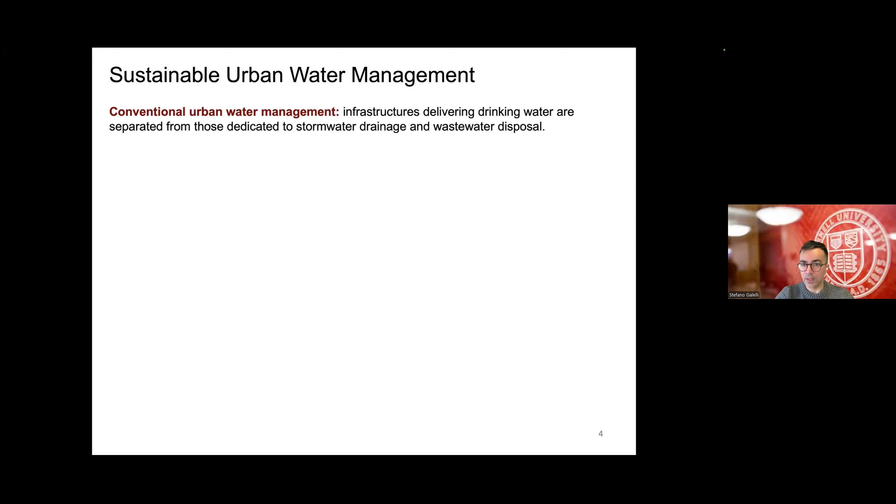So why do we need those types of reservoirs? I think to explain that, it's important to take one step back and think in terms of conventional urban water management, where infrastructure that delivers drinking water is typically separated from that used for stormwater drainage and wastewater disposal.

But if we think about water infrastructure in urban environments for sustainable urban water management, what we see is essentially the combination of infrastructure that can serve multiple purposes at the same time, such as supplying drinking water, retaining stormwater, and perhaps, to some extent, supporting wastewater management as well.

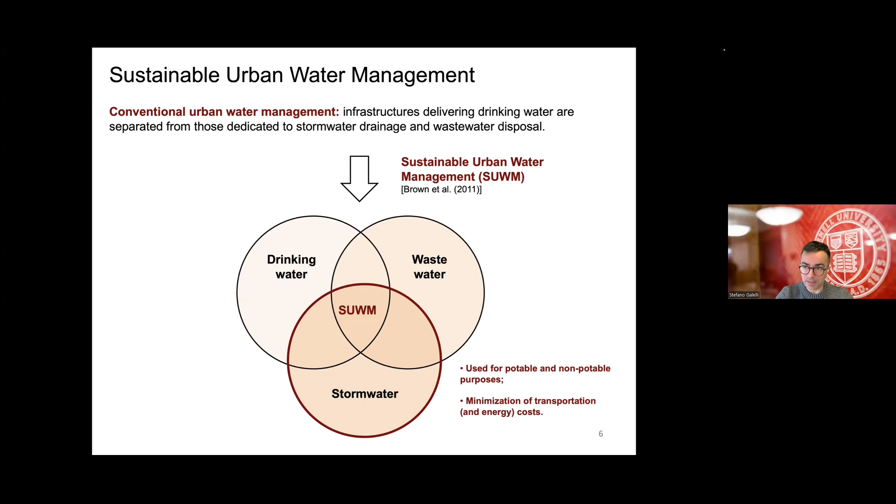So the idea with sustainable urban water management is essentially building infrastructures like Marina Reservoir that can be used for potable and/or non-potable purposes, close to the urban environment, reducing the cost associated with the transportation of water, and ideally helping us start to close the hydrological cycle in an urban environment.

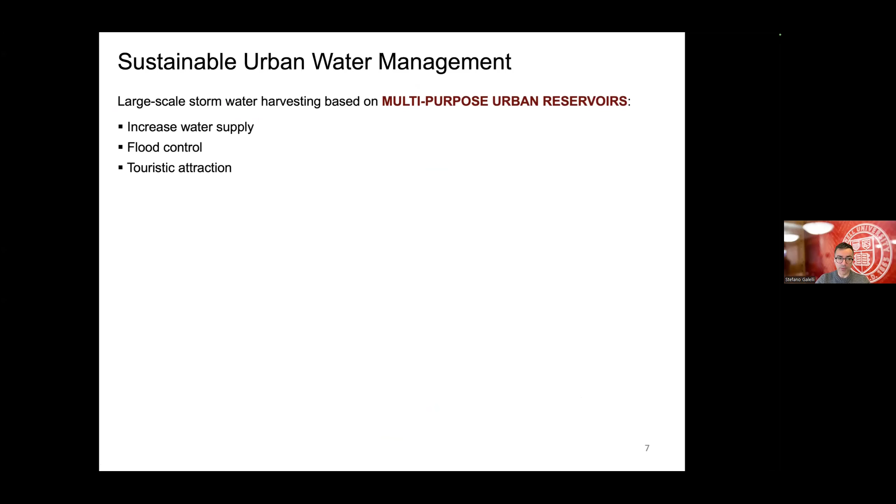These therefore become multi-purpose urban water reservoirs. They can help us increase water supply, control floods in urban environments, and may serve as a touristic attraction. But meeting these different goals, of course, comes with different challenges. So what are these challenges?

First, and I believe this point is particularly important: urban catchments tend to have very large impervious areas, which generates a large amount of runoff. The amount of runoff an urban catchment generates is larger for the same amount of rainfall than that generated by natural catchments, meaning the time of concentration of catchments tends to be very short, and we have to be ready to handle fairly large inflow water volumes in a very short time step.

In a very short amount of time, you will see, for example, later on that the decision-making time step is hourly. This is a big challenge, I believe, for computational scientists as we think about operating reservoirs in real time, or making decisions every hour or every day about how much water we want to release, how much water we want to retain for drinking water purposes. Then we have to be able to decide very quickly and in response to potentially large runoff volume.

The other big challenge is that urban reservoirs located in urban environments often have to satisfy conflicting objectives. For example, we may want to retain as much water as possible to supply drinking water. But on the other hand, the more water we retain within the water body, the higher, obviously, is the flood risk. So how do we handle conflicting objectives while making decisions frequently and quickly is indeed the challenge I want to talk about today.

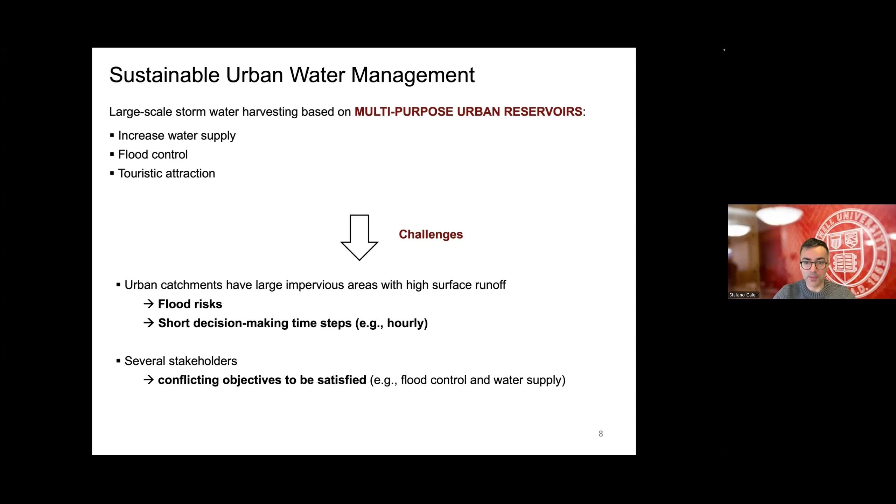So the case study that I'm going to talk about today is Marina Reservoir. I had the privilege and opportunity a few years ago to work on these reservoirs. It was a very interesting project to work on. For those of you who are from Singapore or Southeast Asia, but also for those less familiar with the system, let me give you a little bit of background, and also let me reconnect this to the challenge of working with coastal water reservoirs.

These are very interesting reservoirs because they are coastal. They were created by essentially closing, using dams, the estuaries of a number of rivers. But at the same time, they are urban reservoirs as well, because most of them, excluding a few, are located within an urban environment.

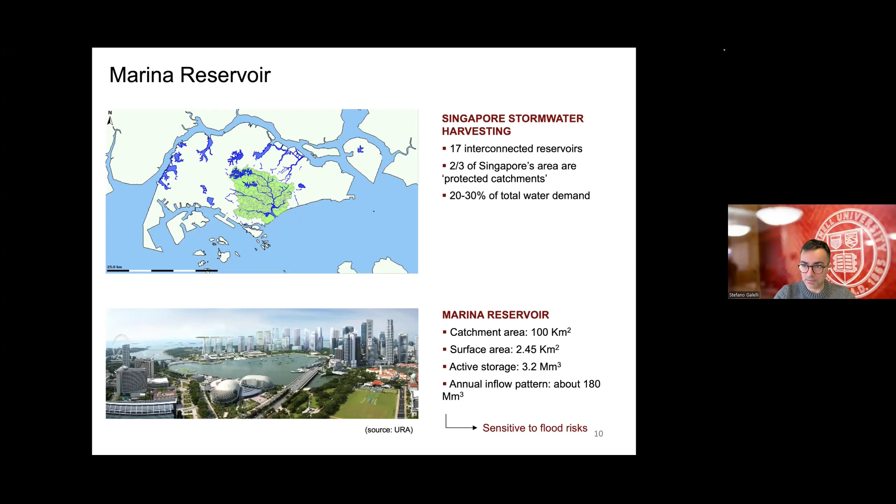Another number I want to give you that I think is very interesting is the active storage, roughly 3-point-something million cubic meters, versus the annual inflow pattern, which is roughly 180 million cubic meters. So you see the ratio is roughly 1 to 60, 1 to 55. This suggests that these reservoirs can fill and empty many times during the year, and that can happen very quickly. So being able to operate this reservoir properly, as Singapore does, is very important.

As the reservoir operates, there are 7 pumps that can be used when the water level in the South China Sea is higher than the reservoir in Marina Reservoir. There are a number of weirs that can be opened, and there are also bottom pipes located at the bottom of the reservoir. The primary objective is to protect the city center from floods while storing drinking water for water supply. Being able to operate the barrage efficiently is important, perhaps less important than flood protection and drinking water supply, but it's still of value. At the time we were working on these reservoirs, there were also conversations about making sure that the water quality within the reservoirs remains good.

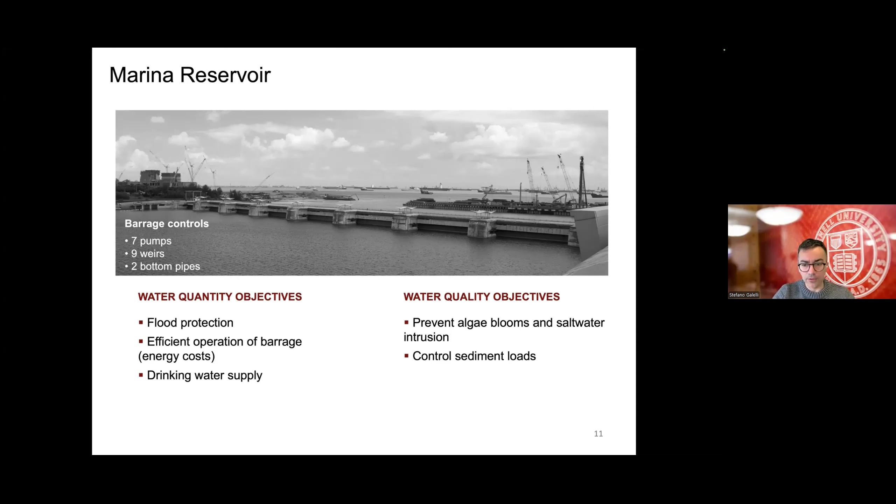That means preventing algae blooms, preventing the intrusion of salt water, since the reservoir and dam are built to separate the estuary from the South China Sea, and also controlling sediment loads to the reservoir.

Just a few more details about the hydraulic infrastructures. As mentioned, during low tide events, if it's necessary to release water, the weirs can be used, whereas during high tide events, Marina Barrage is equipped with large pumps that can pump water outside. Of course, pumps require more energy than operating gates.

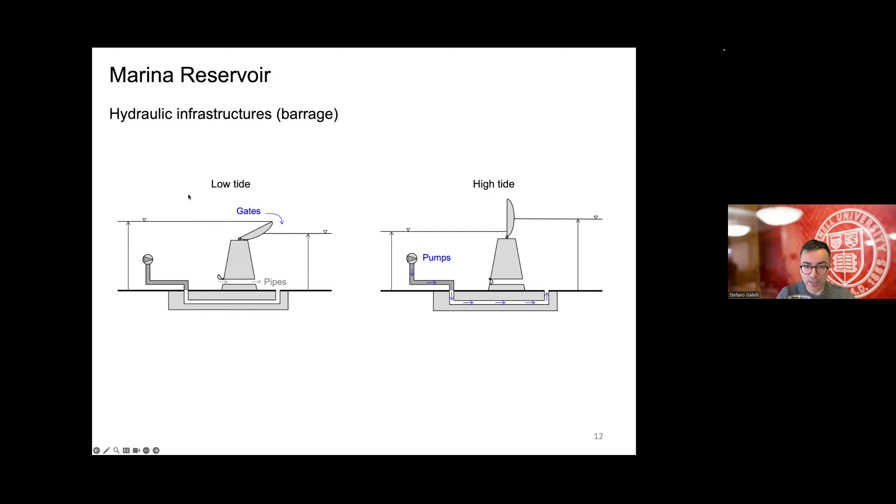The reservoir is also equipped, a few kilometers upstream, with a drinking water intake that supplies water to the drinking water facilities.

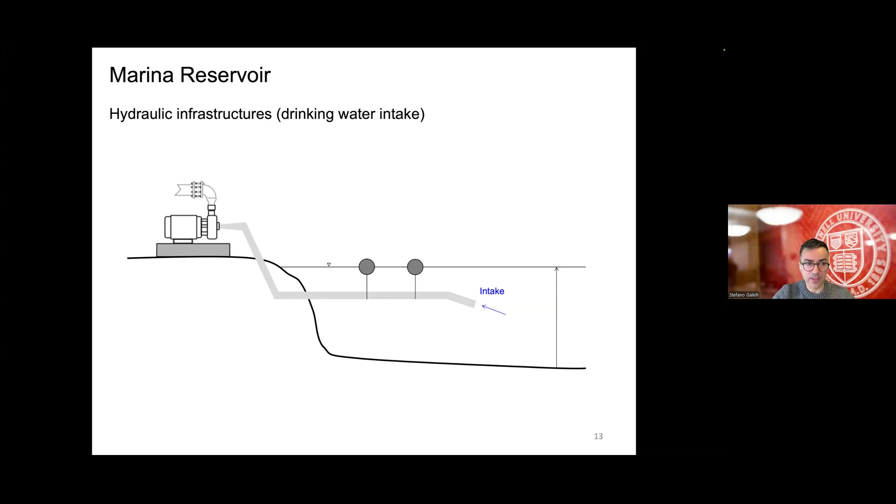Now, let's talk about water quality control. The seminar gets a little bit more technical. The fundamental question here is, how can we support decision makers? How can we make decisions in real time? By real time, I mean hourly, in order to operate this reservoir in the best possible way. This part builds primarily on optimization, water system analysis, and a little bit of hydrological modeling.

First thing first, and this is a diagram that we'll probably use in any of my classrooms. What we want to do is to have a schematic, get a sense of how the water system could look like. So the core, of course, at the heart, we have Marina Reservoir.

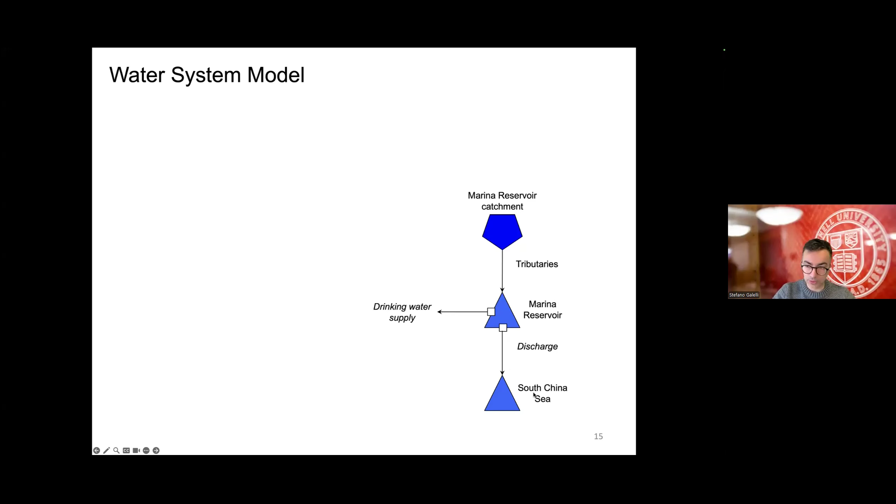It's a reservoir with a number of control variables. We have an inflow that essentially comes from the multiple tributaries located in the Marina Reservoir catchment. And then downstream of the reservoir, in this case, is a coastal water reservoir. We're not discharging into a river, we're discharging directly into the ocean.

So what are the control actions that we can take here? We have to decide how much water we want to discharge to the South China Sea using surface gates, how much water we want to discharge using pumps, and this is preferable to using pumps if it's feasible during low tide events. And then, how much water we want to supply to the drinking water facilities.

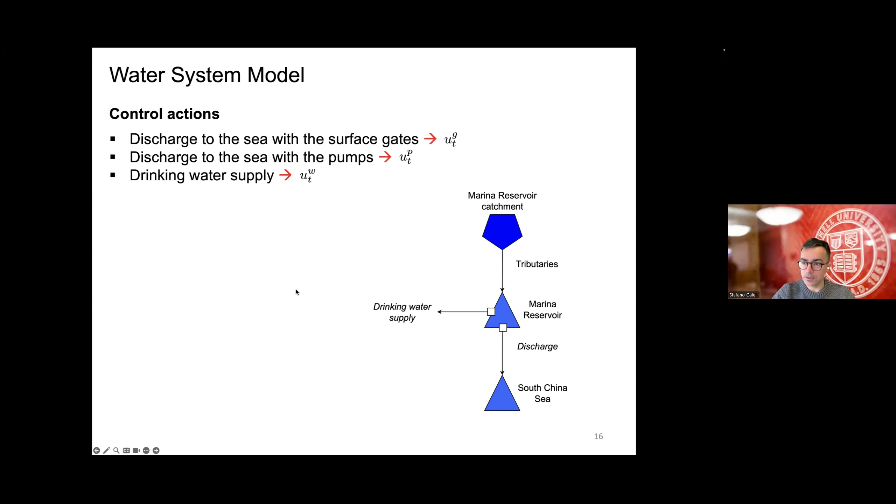So that's the first thing, right? We want to understand what are the actions that we want to take. Now, actions have always to be tuned or calibrated to meet some specific objectives of interest. The objectives that we came up with at that time were discussed, to some extent, with the Public Utilities Board of Singapore. So what does, in fact, make sense in terms of taking actions?

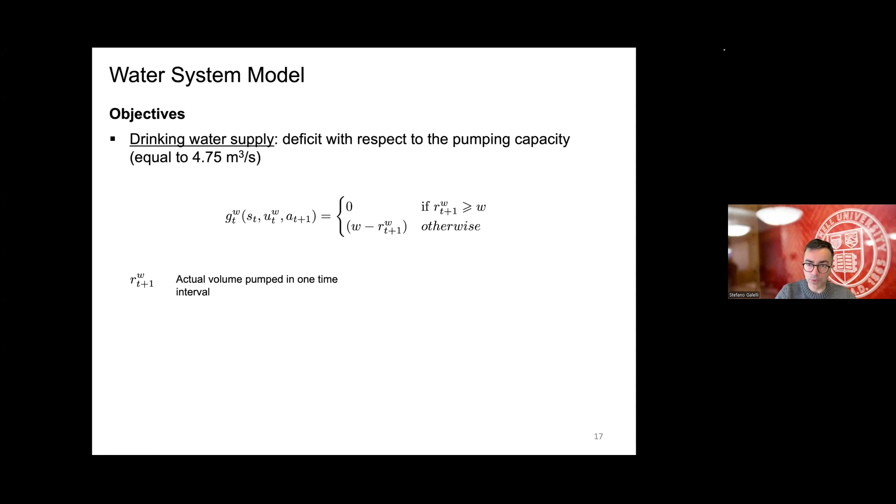First objective: this reservoir is designed to serve multiple purposes, including drinking water supply. The idea here is to define a step cost, as we would call it in control theory, that is equal to 0 if the amount of water we are pumping upstream is equal to or larger than the required amount, which in this case was close to 5 cubic meters per second. Otherwise it is a deficit of water supply, so we're paying a penalty associated with not pumping enough water to the drinking water facility.

Second, which is very important, is flood risk. There's an operating range of roughly half a meter. H here indicates the water level in the reservoir. And the ideal target is to keep the water level in the reservoir within this target.

Why this target? Two reasons. This is a safe operating zone or operating space for the operators, so as long as they're in this range, it's relatively easy to handle big flood events coming into the reservoir. At the same time, keeping the reservoir in a range of roughly half a meter preserves the beauty of the rest of the reservoir, which is really an iconic water body located in the heart of Singapore. As long as we are within this range, everything is fine.

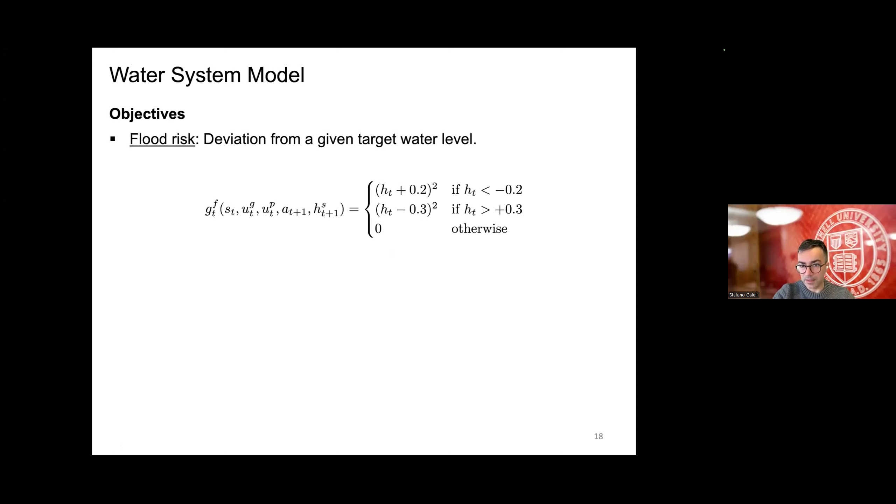But as we go outside of this range, either above or below, we essentially square the distance between the actual water level and the ideal target. So this is our second step cost.

And then third, as mentioned, perhaps less important, accounting for pump use. If we're trying to reduce energy use, it may make sense to account for how much water we're pumping instead of releasing using gates. So here we're simply squaring the water that is released through the pumps.

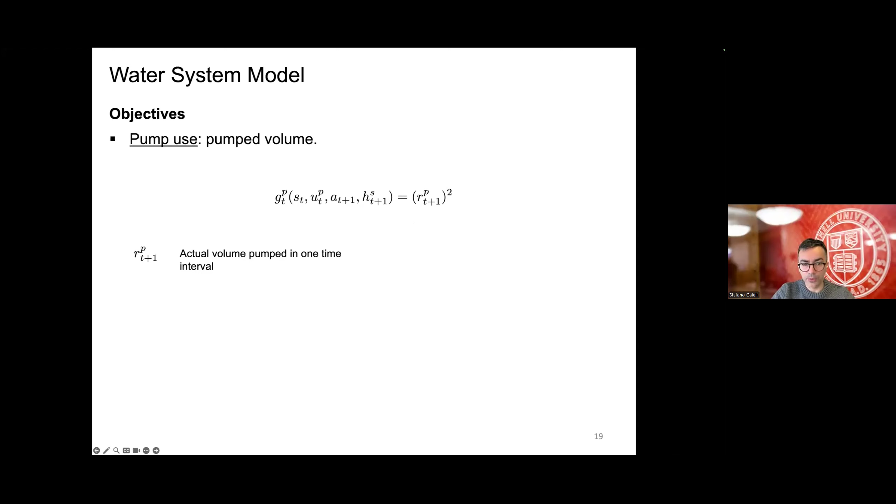Now, if we look at the entire water system again, we start to populate this system with a few terms I've just introduced. We have an inflow to the water reservoir, denoted here as A. We have the water storage, calculated simply using a mass balance equation. We determine how much water we want to pump upstream to the drinking water facilities.

And then we have to make a decision, denoted here as G and P, which is essentially how much water we want to release through the gates and how much through the pumps. Some of you with a keener eye for mathematical notation may wonder why I have the decision and then the corresponding release for the upstream pumps for drinking water supply, as well as the decision for gates and the actual release we implement through gates, and the same for the pumps. The reason is that sometimes we make decisions, but those decisions may not be feasible because they violate technical, physical, or legal constraints. I'm not going into the mathematical details of that, happy to answer questions if you're curious. But the idea is there's essentially a difference between what is being decided and what can actually happen.

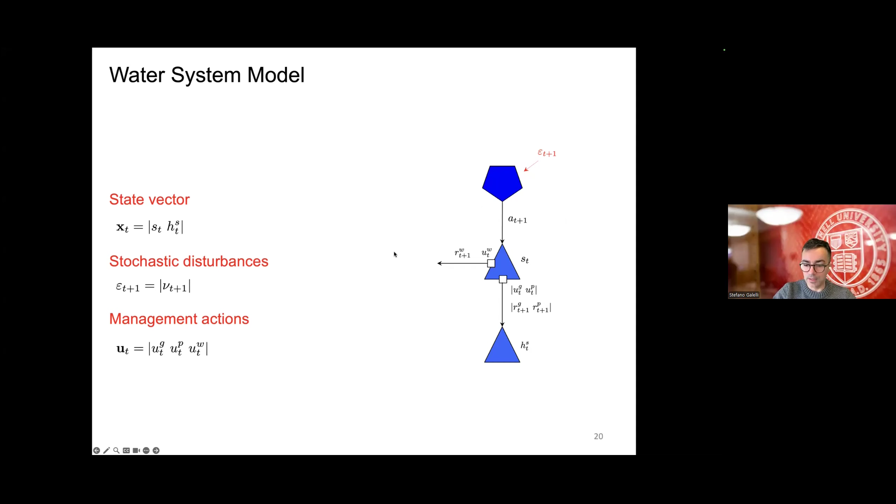So what we did here was to combine these three different objectives using a weighted sum, giving priority to flood control and drinking water supply. We take the expectation of this because the inflow is a stochastic process affecting the reservoir dynamics, and it's hard to determine when we will stop using the policy.

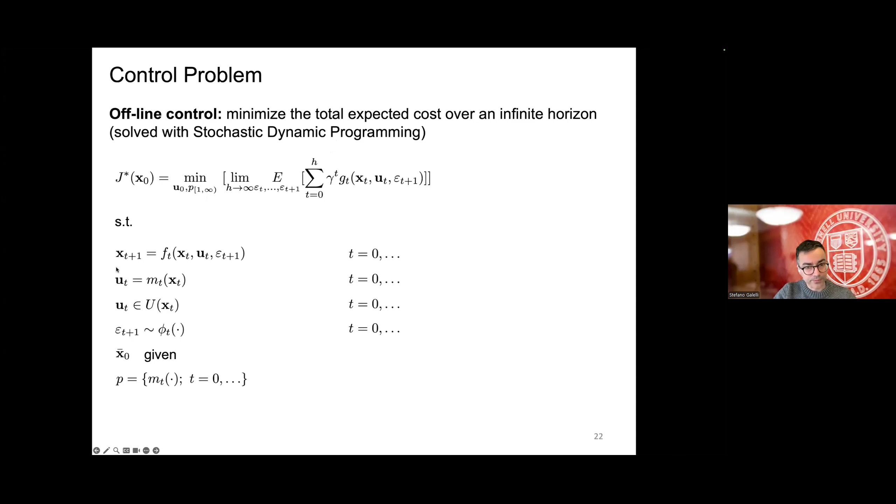And what we're trying to get is our control policy. I know it's a little abstract, so let me go to the next slide and show you how the policy looks. Once you see the policy, I think things will start to make more sense.

If the sea level is below our reference, which is zero, so we are in low tide condition, and there is no water in the reservoir, then we don't really have to release water. But as the storage in the reservoir increases, you see that we bank on the gates more and more. But for very high sea level values and relatively low storage in the reservoir, we can't really use the gates—if we open them, we're actually going to have seawater coming in, which is precisely where the pumps come in.

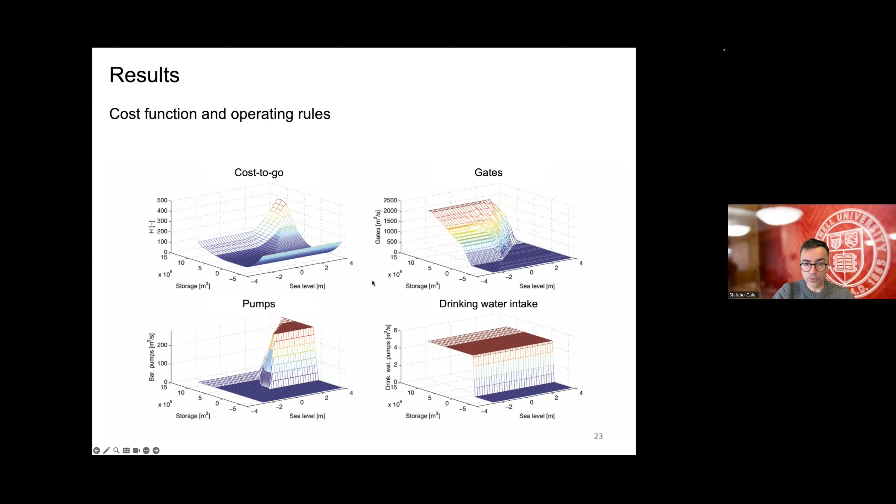Dynamic programming, stochastic dynamic programming, the design of feedback control policies, is a very established control approach in the reservoir operation field, but it has one important drawback: feedback control policies that we design are reactive. By reactive, I mean they essentially respond to an event. So what happened here is that the inflow comes in, and shortly after, the water level starts to increase, and this triggers the response we take through our control policies.

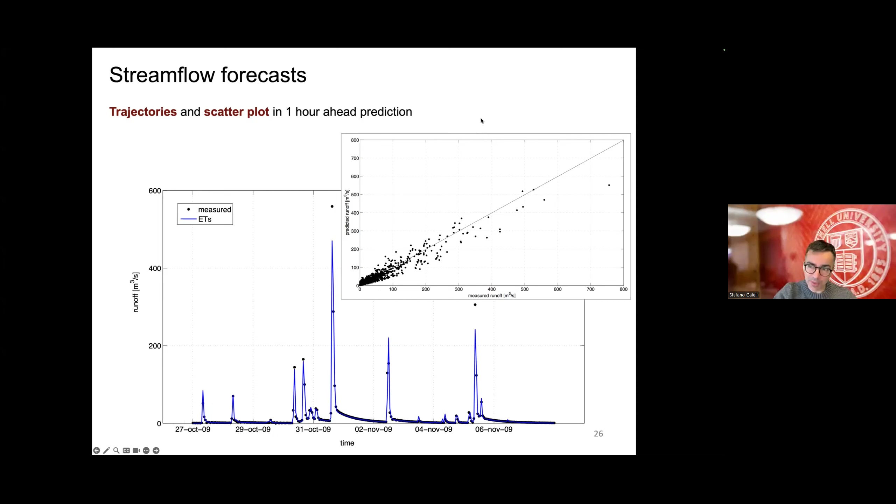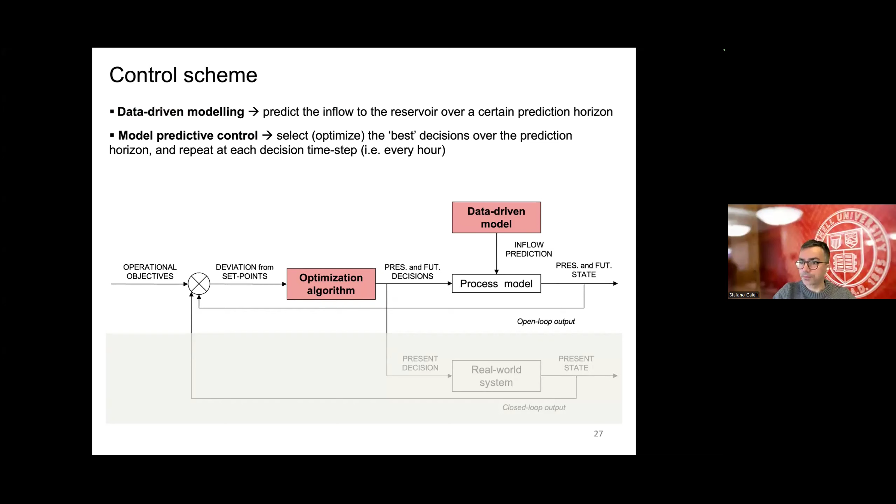Now the question becomes, if we have rainfall forecasts, how can we use them? We cannot use them using the control techniques I've shown you earlier. We switch to something perhaps some of you will be familiar with, which is model predictive control. So what we do is we have inflow predictions, and then we combine these with an optimization algorithm that tells us how to control the reservoir, the different aspects of the operation, using the predicted inflow. So back to our control problem now.

Our control problem is slightly different. We're not looking for a control policy, we are looking for decisions directly. What we want to optimize is the release from gates, pumps, and the water intake over our prediction horizon, which in our case is 1 hour, for example, subject to constraints that are pretty much the same as the ones we used before. We also use our inflow prediction. The useful information, as mentioned, is the one that is 1 hour ahead. For 2 and 3 hours ahead, forecasts are not as accurate.

Now this is a busy plot, so let me skip this for a second and let's go here. What I'm doing is contrasting the performance obtained with dynamic programming, through the design of feedback control rules, versus model predictive control. We have different objectives - remember, we're interested in flood control, pump usage, as well as drinking water supply. So here I'm projecting solutions obtained by combining our 3 objectives differently, essentially prioritizing objectives in a different way, and solving the problem multiple times.

This is the period where the inflow forecast model was cross-validated, and so we try to retain also the cross-validation for the policies. Now, before going more into the details, what do you see? Well, you see that if you want to improve performance in flood control, so reduce deviations from the control target, then you need to use pumps more frequently. Whereas if you want to reduce the use of pumps, then we are going to pay a cost in terms of deviation from the flood control zone. So there's essentially a trade-off, a conflict between these different objectives.

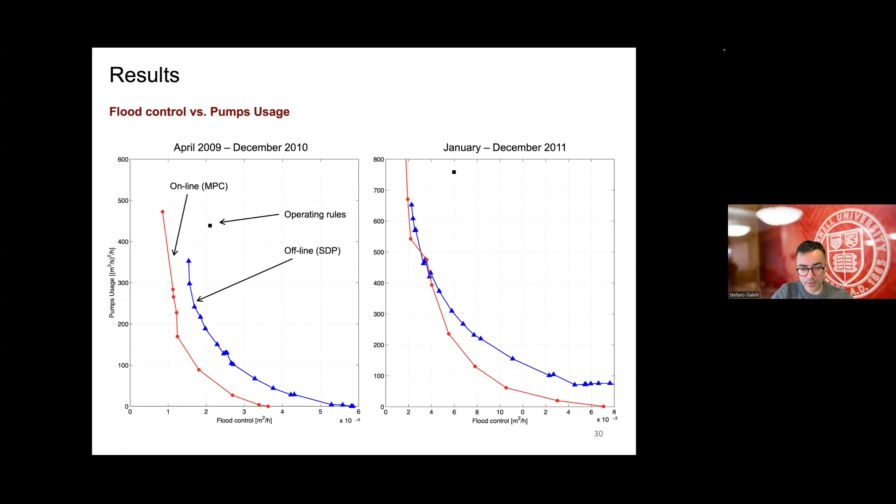The interesting thing you see here is that at some point, there's not really any improvement in having rainfall forecasts, even perfect ones, that are longer than 6 hours, that have a prediction horizon longer than 6 hours. The reason behind that is, I think, fairly intuitive and simple. This is a small reservoir that gets a lot of inflow from a large catchment, and if we consider the size of the entire country, the reservoirs can fill and empty very quickly. So in a few hours, the reservoir can be emptied, can be filled.

As long as the forecasts are able to cover or predict an entire emptying and filling cycle, then there's no need for longer forecasts, right?

So essentially, in this case, what we see is that forecasts that look a few hours ahead can really push the performance, and we can get either the same level of flood control with lower pump use, or for a given pump use, a much better level of flood control.

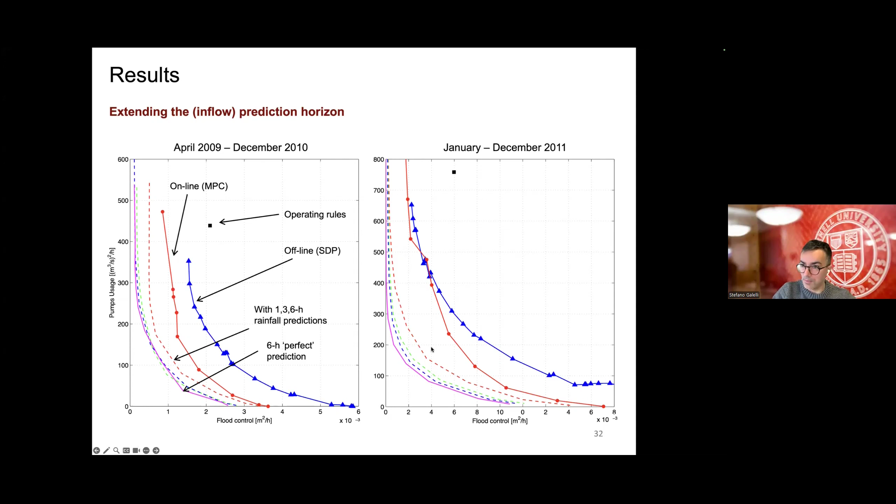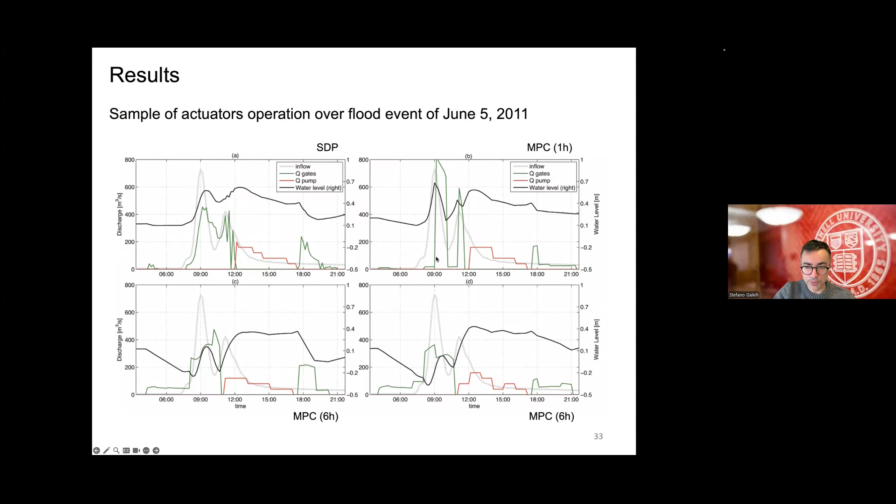Now if you use a 1 hour stream flow ahead prediction with model predictive control, you see that we start to make decisions that are a little bit different, because we try to, at least to some extent, anticipate what happens.

But now if you look at 6 hours ahead, these two plots here are just different configurations of model predictive control, but they both use a 6 hour ahead prediction. Then you see the control dynamics are very different.

This is when the inflow happens, the inflow event. But because we know about this 6 hours before, we start to pump much earlier. We drain the reservoir down to minus 0.2, which is the lower limit of the operating range.

The reservoir fills in response to the inflow event, but because we've already prepared it, it's much easier to handle this event. We use gates, then we use pumps, but you see that the water level is, for most of the time, in the range between minus 0.2 and 0.3.

Which is something we kind of struggle to do with stochastic dynamic programming. We improve slightly with predictive control, but this speaks essentially to the importance of longer rainfall and streamflow forecasts.

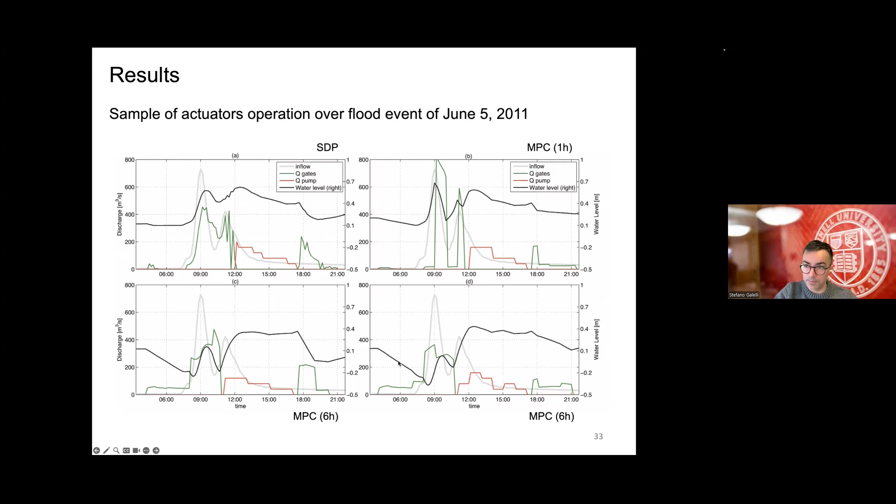So some important take-home points: inflow prediction and model predictive control in general, for catchments, urban water, coastal water reservoirs, allow us to explore a much better trade-off between different operational objectives.

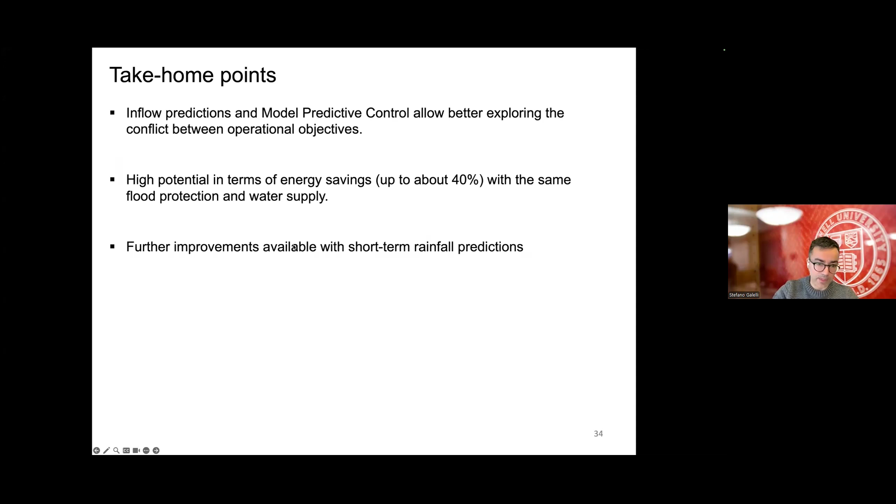Now I want to touch briefly upon water quality control. I know I'm running a little behind schedule, so I'm just going to show you a few basic ideas here, and maybe keep my seminar to 42 minutes instead of 40. I hope you won't mind that.

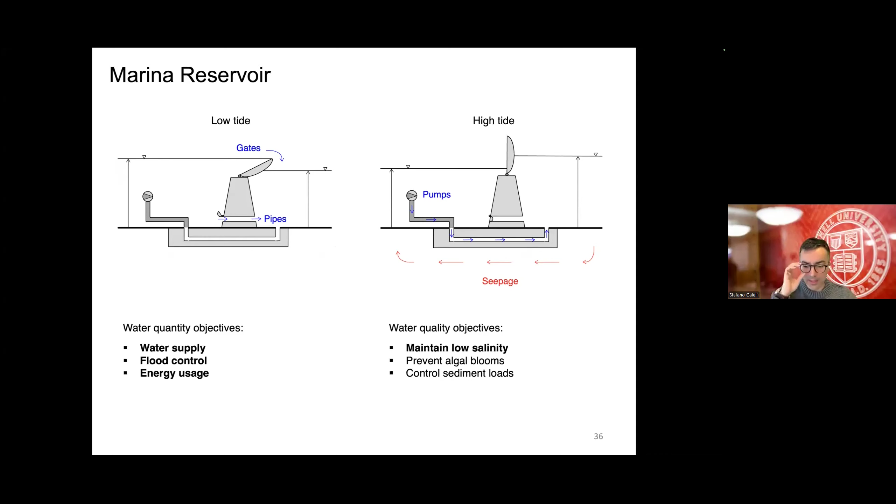So the issue we were looking at the time was seepage, a slight infiltration of salt water in the area of the reservoir. And so the question was, how can we account for that?

And the fundamental problem there was that, imagine taking this model, which has a real-to-runtime ratio of 100 to 1, meaning that to simulate 100 minutes, it takes roughly 1 minute. Embedding a model like this within a model predictive control scheme that every hour keeps re-optimizing and suggesting what decisions should be made, that's challenging to do.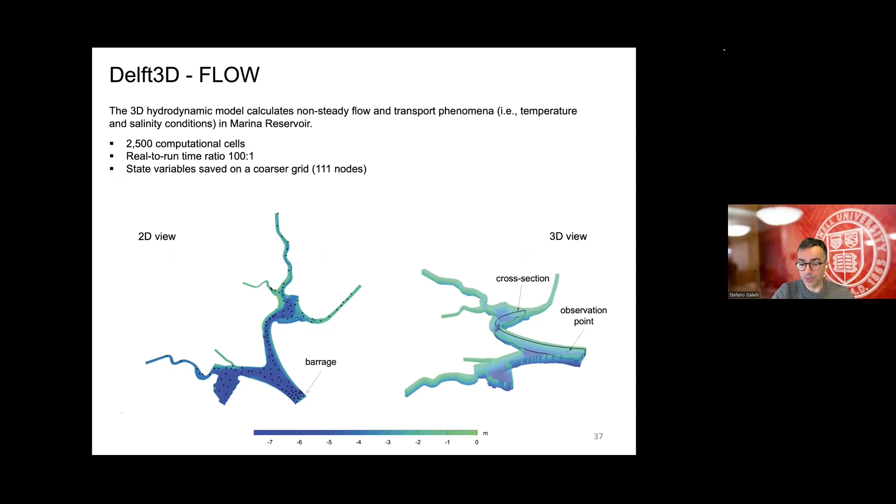It's computationally not feasible. So what we did at the time was essentially set up a design of experiment, where we run our process-based model, Delft3D, many times, with essentially hundreds of simulations.

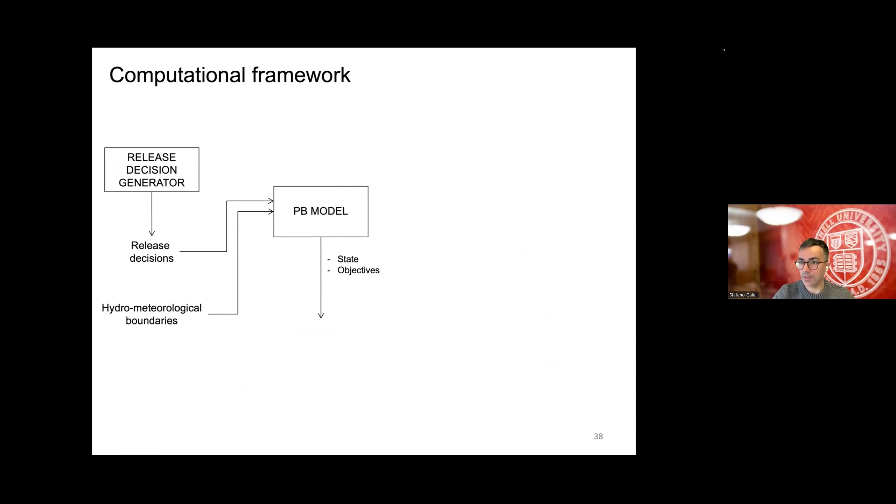We use that to identify a model emulator, a simple, compact, low-dimensional model that was then embedded within the model predictive control scheme I've just presented for water quantity control.

Except that now what we have is a model predictive control that can optimize for water quantity objectives, as I've just shown, as well as water quality objectives.

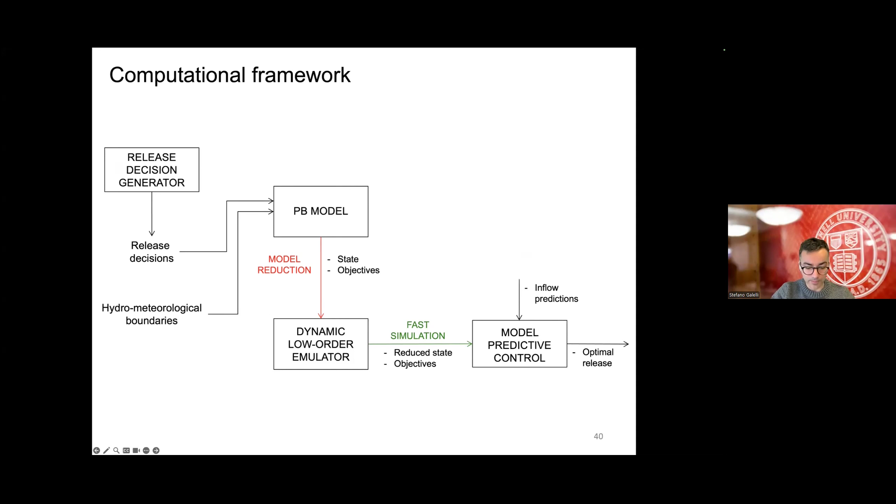I'm going to skip the details of how we actually identified the emulator. I'm just going to show you the optimization problem. So now we have a structure that is very similar to the one I've shown before. We minimize for the control of different actuators.

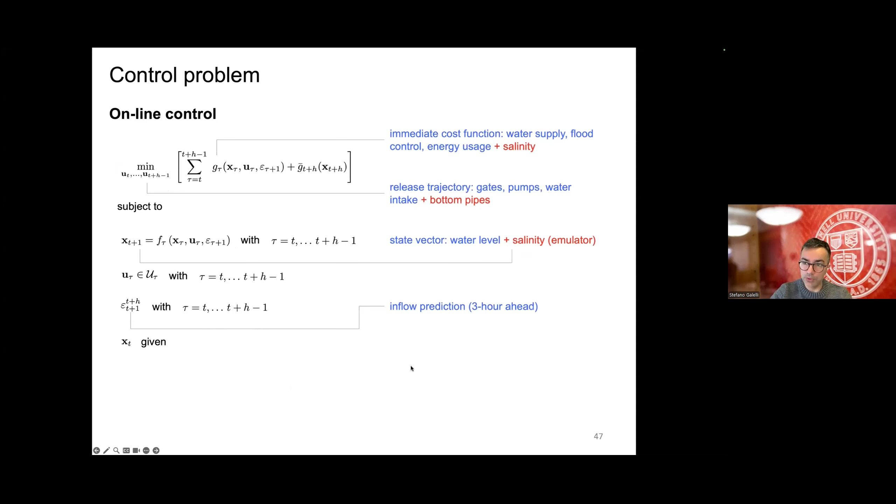We optimize for gates, pumps, water intake, plus the bottom pipes that we can use to release some of the salt water that comes next to the barrage. So it's the same optimization problem, but now informed with an emulator of a hydrodynamic model, which we use to account for a fourth objective: reducing the concentration of salt next to the barrage.

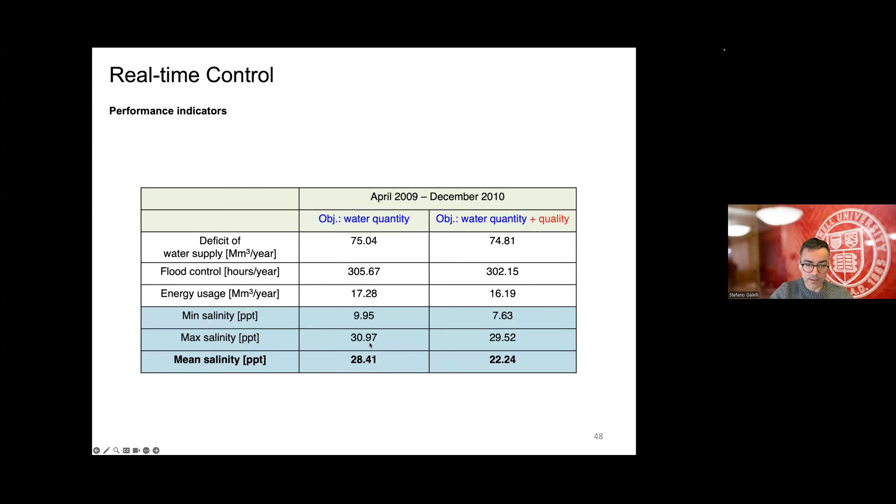If we look at performance here, adding water quality does not really affect the water supply, flood control, and energy usage—these are the water quantity objectives we optimized before. So adding quality keeps the performance pretty similar, but it does help reduce the mean salinity. The maximum salinity, not so much, to be fair, but the minimum salinity improves.

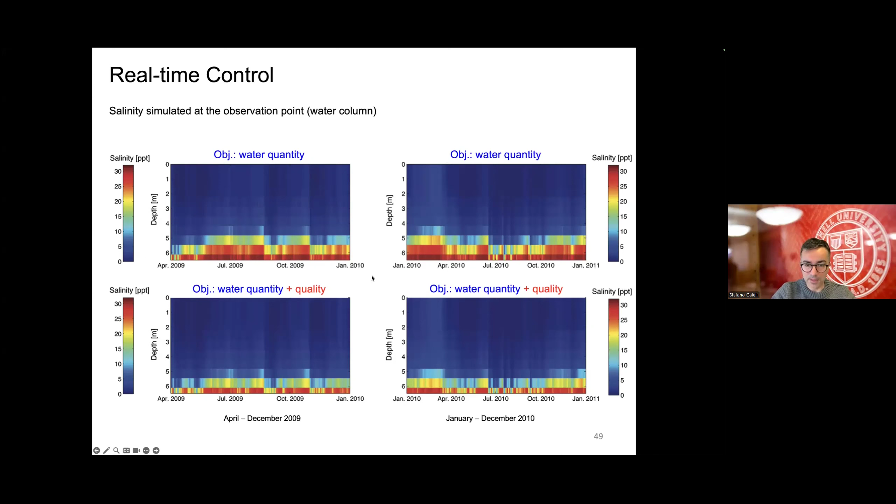Looking over the water column, up to a depth of roughly 6.5 meters in proximity to the barrage, and over time, for the cross-validation period across all models, if we include water quality, contrasting top versus bottom, we start to see a fair, decent increase. This is just from operating the bottom intakes a bit smarter. Now, if we look at this over the cross-section of the reservoir, we don't have time anymore—this is a snapshot, but we look at distance from the barrage.

The first thing we see is that the saltwater intrusion was indeed concentrated only in proximity to the barrage, pretty far from the water intake. But again, if we're able to reoperate the reservoir accordingly, we can have better performance next to the water intake as well.

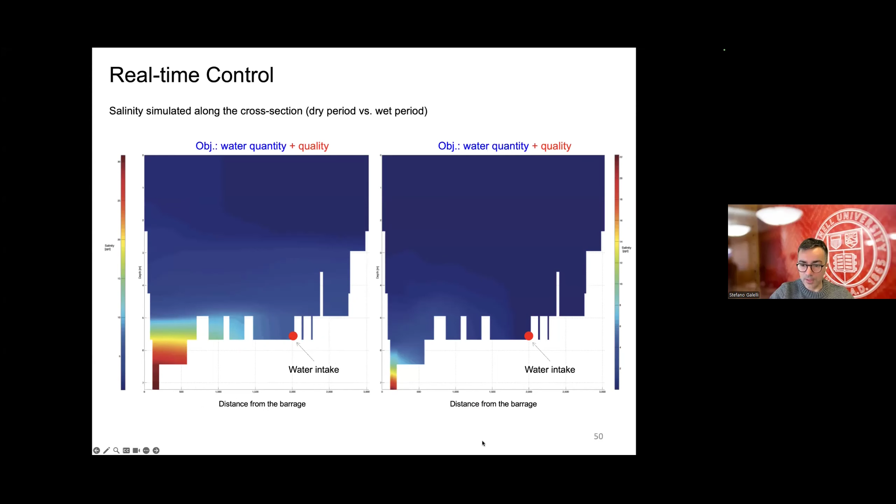To conclude, coastal water reservoirs, especially those located in urban environments used for freshwater supply, are characterized by very fast dynamics, and that is where model predictive control shines as a control technique. Applying it requires streamflow forecasts, and if these forecasts can be informed by reliable rainfall forecasts, then we can really move the needle. As far as I know, that's one direction Singapore was heading at the time.

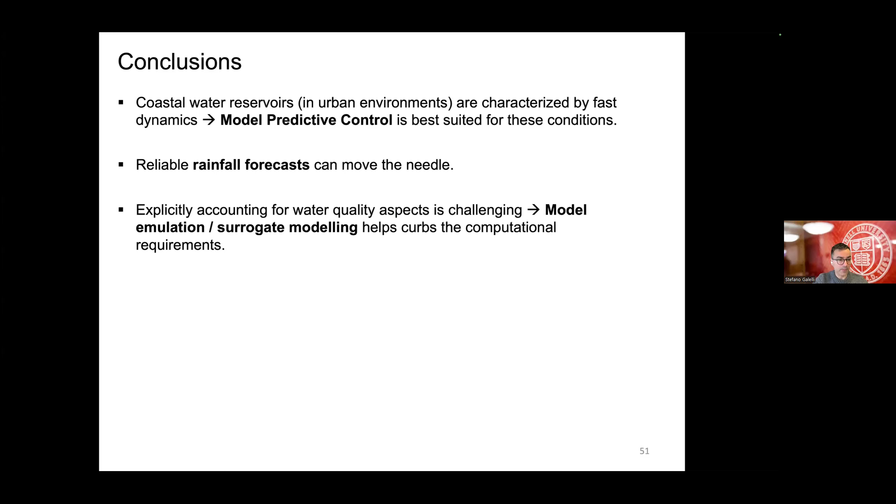But don't quote me on that—I think that's just my understanding.

Accounting for water quality is very challenging because it requires process models that are way more complex than the simple mass balance we use to simulate water quantity within a reservoir. Incorporating complex 2D, 3D, or 1D hydrodynamic water quality models within an optimization scheme is challenging. This is where model emulation and surrogate modeling can shine.

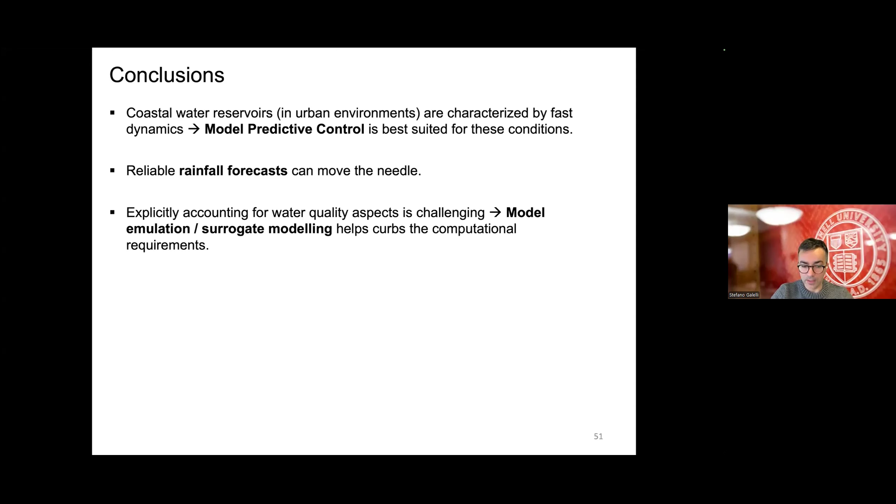This brings me to the end of today's webinar. This is work I did in collaboration with several people over time in Singapore, a few years ago—as you could see from the paper I cited. Several people should be acknowledged: Albert Goedbloed, Dirk Schwanenberg, Peter Jules van Overloop, Vladan Babovic, Hans Eikaas, and Andrea Castelletti.

This work was carried out as part of the Singapore Delft Water Alliance's multi-objective, multiple reservoir management research program, which looked at coastal urban water reservoirs in Singapore—so probably very relevant to this working group. Let me also finally note that all the findings and opinions I've expressed today are my own, and do not reflect the views and opinions of Singapore's Public Utilities Board.